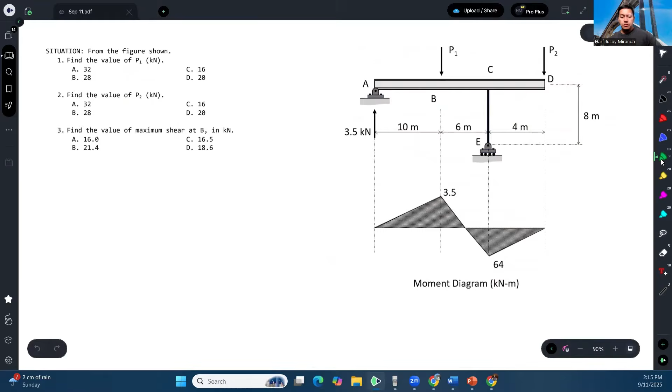And of course, in this problem, the shear diagram is missing. Now, how can we take advantage of that?

So first of all, we know the moment at this point, and that is 64. And then we also know the moment at this point, which is 3.5. And so far, we know the reaction at A. Now aside from the reaction at A, we also have the reaction at C, which is also unknown.

Now, to solve for any of these unknowns, of course, we can apply to the load diagram the equilibrium equations such as summation of forces, x and y, and summation of moment. However, because we have three unknowns in the load diagram, that will not be enough.

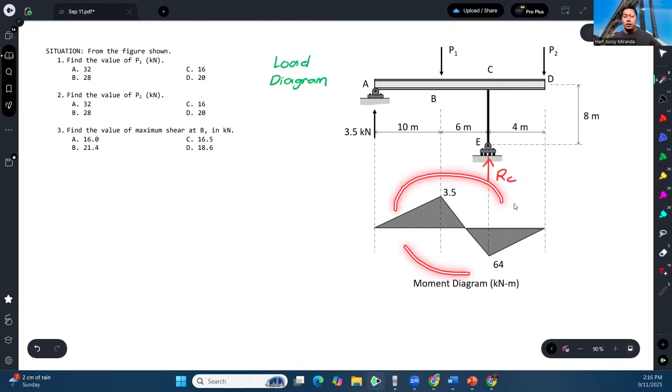So here, we need to think about how we can make use of this moment diagram. Now, as you can see, because this is an overhang member, we can actually utilize this. If we apply method of sections for member CD, for example, I will cut at point C and only consider the right side, this one. Let's see what happens.

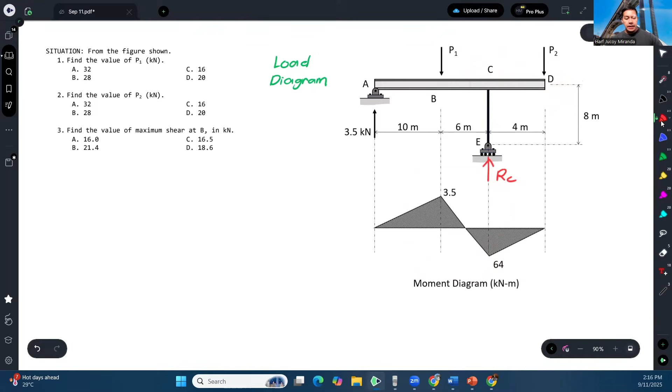So this is going to be the free body diagram of member CD only. Okay, so this is the shape of CD. This will be your P2. Okay, and then this is 4 meters.

Okay, and based on the moment diagram, it turns out that there's a moment here because there's a force here. So there's a reaction there. So actually the reaction is there, yes. So there's a reaction there, and then there's also a moment here. Okay, so moment at C.

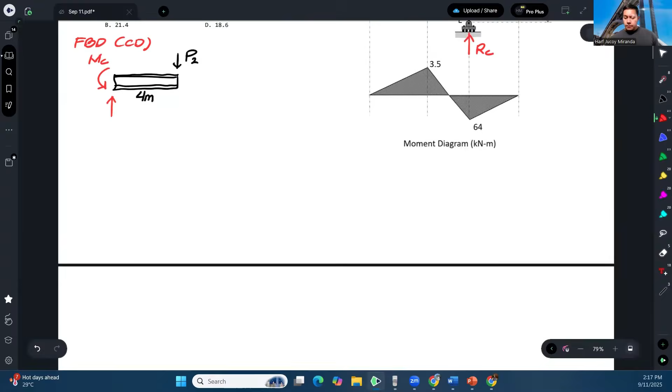So in this case, from the moment diagram, we see that the value of this moment should be equal to the moment value in the moment diagram, which is actually 64 kilonewton-meters. And with that, we can say that MC is equal to 64. So this is point C, and this is the point.

Now, to solve for P2, we can apply summation of moment. So, summation of moment at point C is equal to 0, assuming counterclockwise is positive. So we will have MC, which is counterclockwise - I'll explain later why it's counterclockwise - and then plus P2 times the moment arm which is 4, is equal to 0.

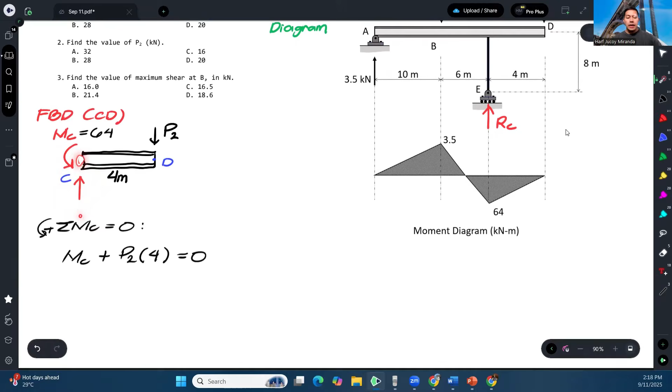And whatever this may be, or actually, that's already P2, right? But whatever that may be, since we're taking moments about here, so it has no moment. So that's the idea. And from here, we can say, so let's plug in the value: 64 plus P2 times 4 is equal to 0.

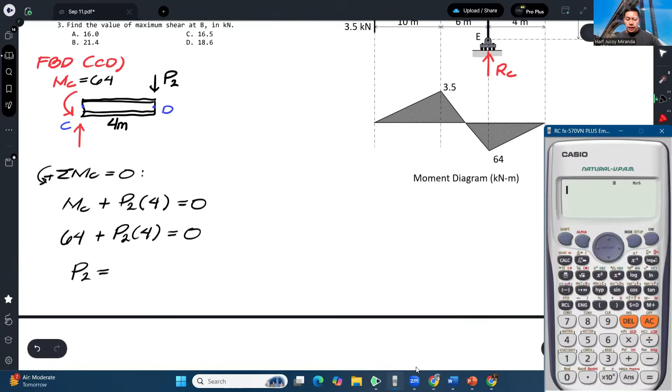So therefore, we can first solve for P2, and that is 64 divided by 4. That gives us 16 kilonewtons. Okay, and actually, this is our answer to the second question.

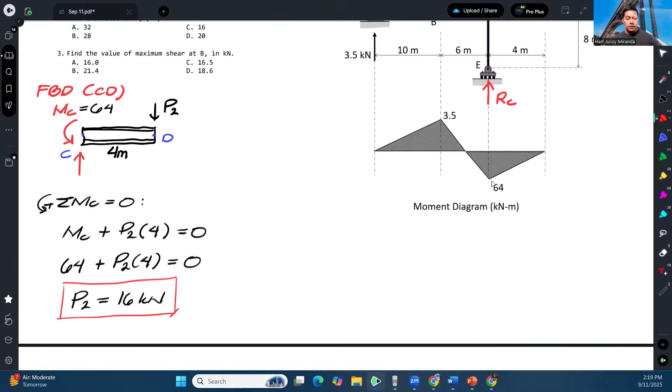Okay, so that is number 2. Our answer is letter C.

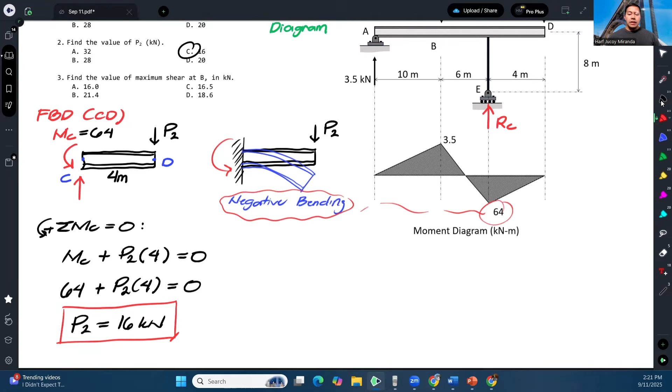Now that we have the value of P2, we know that P2 is 16. So going back here, we can simply apply the equilibrium equation. Let me mark this already, we've found this to be 16. So here, to solve for P1, we can just apply summation of moment at C so we don't need to solve it separately. Taking summation of moment at C, which is at the bottom, from the load diagram.

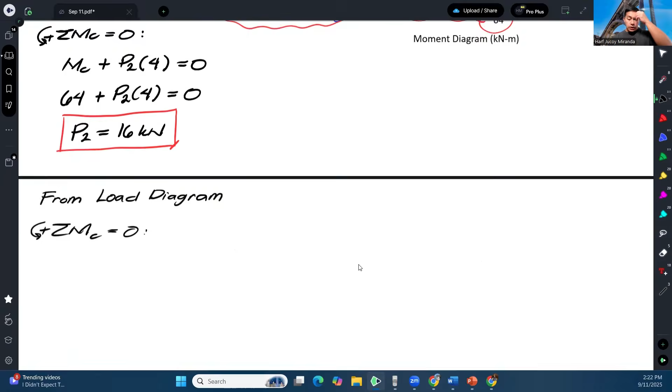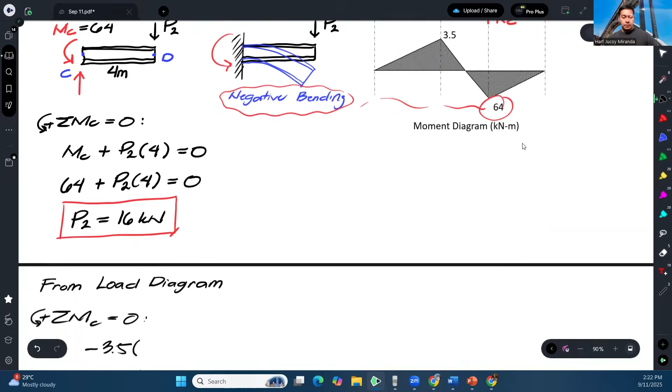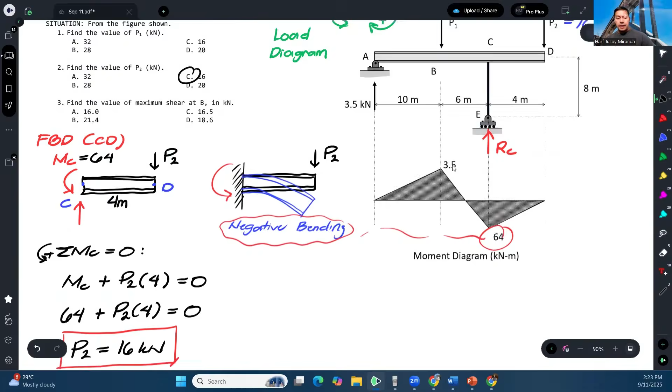Taking summation of moment at C equals 0, assuming counterclockwise positive. So we have the reaction here, which is clockwise, so negative. The moment arm of 3.5 from C is this, which is 10 plus 6, or 16. Then we have P1, the moment arm of P1 is 6, and its rotation is counterclockwise, so positive. Lastly, we have P2, which is 16, the moment arm is 4, and the rotation would be clockwise, so minus.

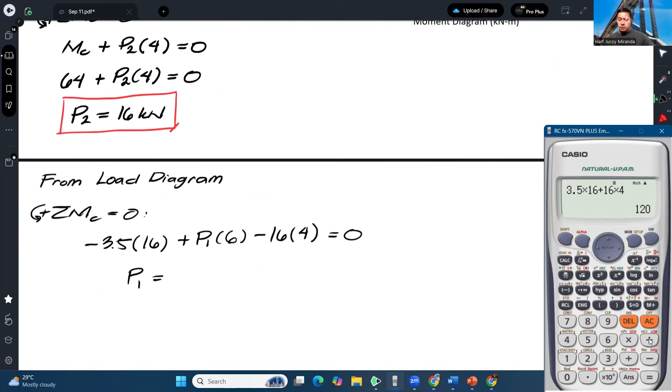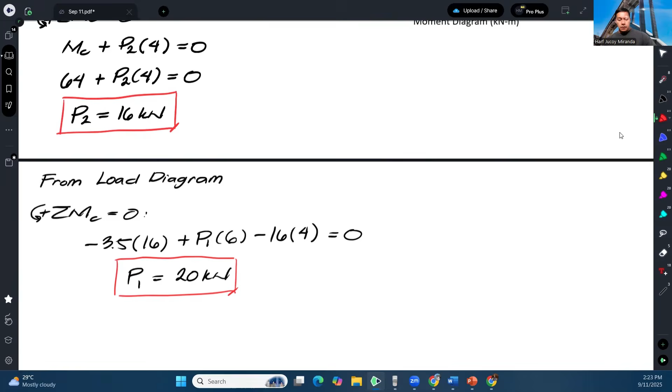So therefore, P1 can be calculated as 20 kilonewtons. So that's our answer for number 1. So, 20.

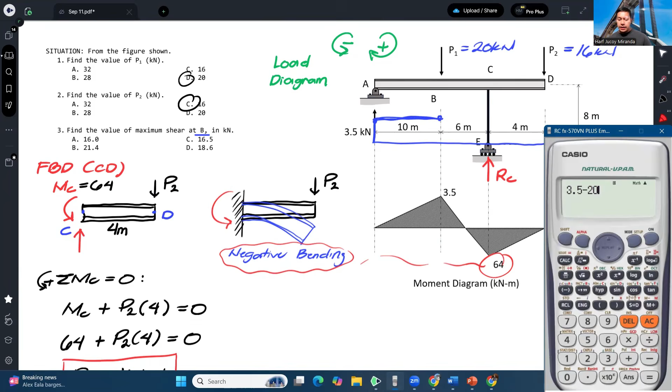Okay, this is the shear diagram. Starting off with 3.5, and then going here, that's 3.5. And then 3.5 minus 20, so that's negative 16.5. Then here, presuming this, 16, because upon reaching here, it's 16. So that's our shear diagram.

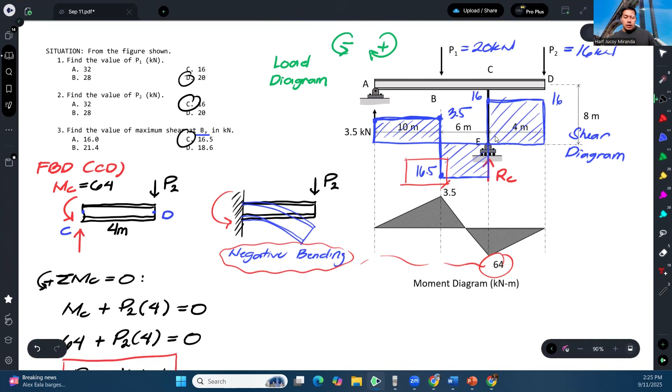And what's being asked, what is the maximum shear at point B? As we can see, there are two values: the left side of B is 3.5, and the right side of B is 16.5. So this one is bigger, so our answer would be 16.5. All right, and that's how we solve this problem.